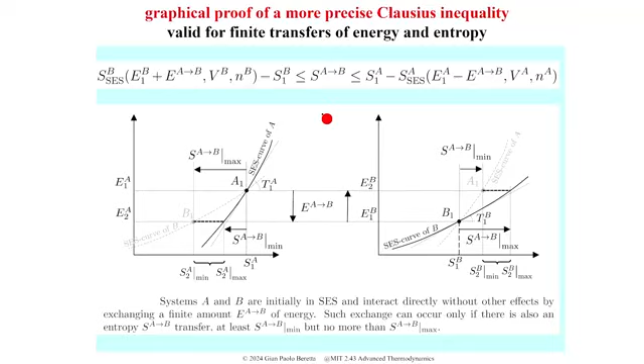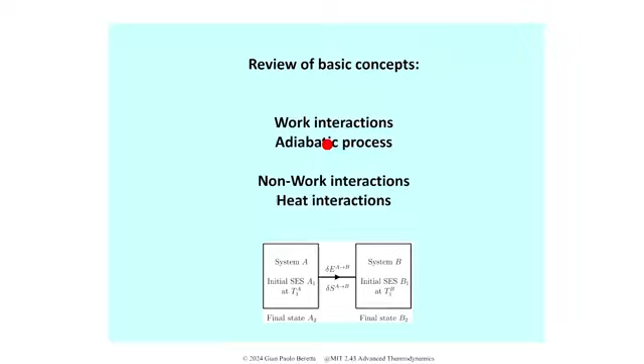So today I wanted to talk about some traditional results. And we still need to define what we mean by heat. First of all, we define what we mean by work. So work is a mode of interaction in which there is no entropy transfer and no transfer of amounts of constituents. So that's, for example, what happens in a weight process. In a weight process, if during the entire process there are no external effects, then the system experiences a work interaction.

As you may read here, it says that a weight process may be adiabatic. We call adiabatic process a process in which there are only work interactions. Why may be and not is adiabatic? Well, because a weight process is a process in which the only net external effect is the lifting or lowering of a weight. The net effect. But you could have some temporary effects that are initially done and then undone, which may not be describable by lifting or lowering a weight. So in that case, it's still a weight process, but during the process there were interactions that may not be work.

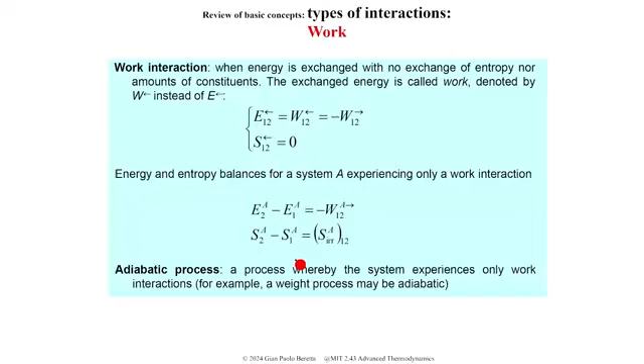But for simplicity, if you want to fix ideas, a good example of an adiabatic process is a weight process in which there are no entropy transfers all along the process. Anything that has an entropy transfer, we call it non-work. So non-work is a very broad class of types of interaction. And in this broad class, there is one limiting condition that we call heat interaction. We will see in a moment the defining idea behind what we call heat. It is a limiting process, and it doesn't exhaust all the possible non-work interactions. So not all non-work interactions are heat.

And in fact, I already anticipated last time that during a heat interaction, we have a very well-defined ratio between the energy that is exchanged, that we call heat, and the entropy that is exchanged. Energy over entropy is the temperature at which that interaction occurs. So in order to characterize a heat interaction, we only need to say it's heat, how much energy is transferred, and what is the temperature at which it is transferred.

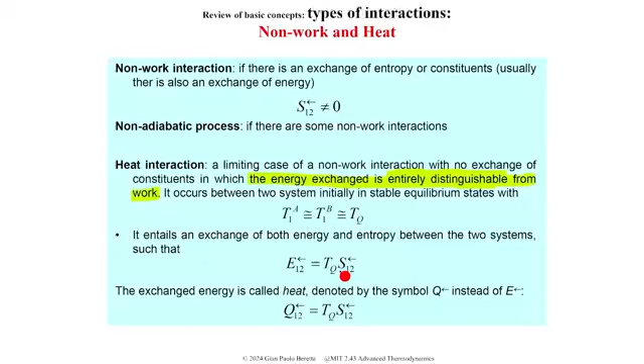But what's the defining criterion for heat? One way to put it is we want to define an interaction which is completely distinguishable from work. So an interaction in which these two systems, say system A and system B, exchange energy and entropy, and no fraction of the energy that is exchanged between the two can be recognized as work.

What does it mean? All right, we do it operationally. Let's say that we extract some energy from system A. And let's suppose that we intercept that energy, and before giving it to B, we feed it to some machinery that will try, at its best, to split that energy into a part that is recognizable as work and the rest.

Okay? So this, sometimes, traditionally you would call it a Carnot engine, or let's call it a cyclic machinery. Cyclic because it has to return to its initial state, and so whatever it does, it's not because you consume the machine, but because of the operations of the machine.

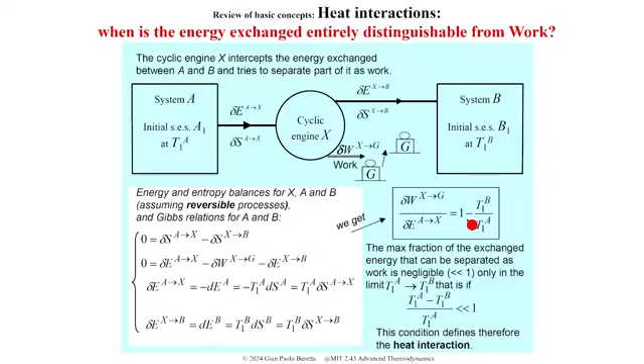We will call heat only in the limit in which this ratio goes to 0. And that goes to 0 only in the limit in which the two temperatures get equal or very close to one another. And in terms of that train of inequalities that we have seen, the Clausius inequality last time, that interval of values, if the two temperatures are equal, shrinks to a single value, and therefore we get a definite entropy transfer for a given energy transfer. And that's how we get the famous equation that delta S, the entropy exchanged, is the energy exchanged over T, so Q over T.

And of course, I have stressed it so many times, but we notice that we are defining heat here using entropy. Usually, it's the other way around. The traditional expositions start from some hand-waving definition of heat, and then some definition of temperature, and then Q over T becomes the entropy. That's what I call the hand-waving heuristic definition of entropy.

That, to be frank with you, is what got me started with this subject, because I was so unhappy with the way the subject was explained to me that I wanted to study more. So it's funny. You hate a subject because you don't understand it, and then you come to love it because you want to understand it.

All right, but how does this definition match with our usual understanding? Because if I ask you what's heat, well, heat is the energy that is transferred between systems at different temperature, you would say. Well, we just said no. Heat is the energy transferred between systems at the same temperature. So is there something wrong? And in fact, there isn't.

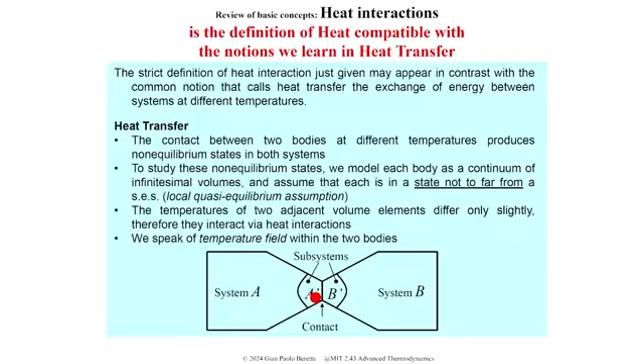This describes what I just said for, say, a solid. So suppose we concentrate on this infinitesimal element of solid or continuum, in which the coordinate is only, let's say, one-dimensional. Coordinate is between x and x plus dx. So it's infinitesimally thin. And it is in contact with the element to the left and the element to the right. And for simplicity, let's just study a steady state situation here and make the energy balance and the entropy balance.

So if I make the energy balance for this lamina, I should put on the left-hand side the rate of change of the energy of the lamina, and on the right-hand side, the net contributions of the interactions to which that lamina is subjected. So it receives Q dot. Now I'm assuming it is a heat interaction. So it receives Q dot from the left, and it gives Q dot to the right. If what comes in on the left and goes out to the right is balanced, same rates, the energy balance says that the rate of accumulation of energy of my system is 0, so that property doesn't change with time.

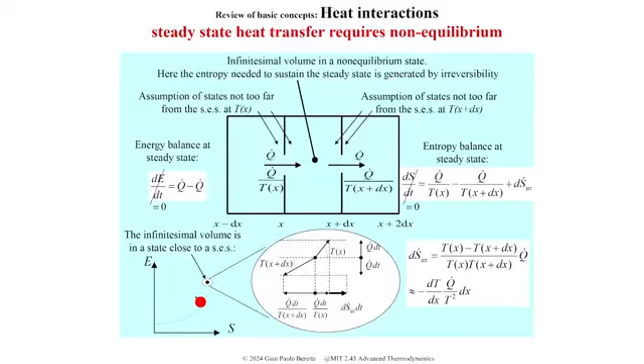But we should not take it too literally, because if we were truly in an equilibrium state, these things couldn't happen. And look at it this way. Let's say that this is the E versus S diagram of my system here, the lamina, the infinitesimal element. Now, yeah, I think I have it bigger here. Okay, so I draw the state of this lamina just a bit off the stable equilibrium state curve. And let's see what happens there. Okay, so this is the state.

The lamina receives both energy and entropy from the left. So from the left-hand side there is a pull that tries to pull the state up because it receives energy, and to the right because it receives an entropy given by Q dot over T. The net result is that the state is pulled in this direction. It wants to move there. On the other hand, there is also an interaction to the right, which takes things away. It takes energy down, so it pulls down the same amount. So these are balanced, and therefore the state will remain at this level.

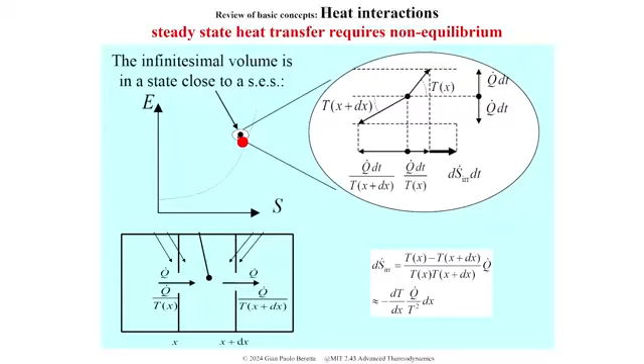This is interesting because it is the local equilibrium model that we are used to in fluid mechanics, but you can improve. And people are doing extensions of fluid mechanics treatment in which you deal with this little difference in entropy, because maybe you can assign a temperature, but the entropy of this state is slightly less than the entropy of a truly equilibrium state at that temperature. And that difference in entropy sometimes has an importance for certain applications. Okay.

So now I wanted to talk about these very traditional ideas of heat engines, heat pumps, and refrigeration units, and see the energy and entropy that flows, and it also gives us the opportunity to define what we mean by first and second law efficiency of devices like this. So let's start from what we are seeing. So let's do it our own way.

Suppose we take the Clausius inequalities that we have seen the other day, and remember that these subscripts over the inequalities indicate what the condition should be for the strict equality to hold. And here, if you remember, we have a strict equality if the system is in a stable equilibrium state and ends in a stable equilibrium state, and it is a reservoir, so that the second derivative is equal to 0.

So let's consider our system to be a reservoir at temperature TA. I drop the subscript 1 because for a reservoir there is always one temperature for all states. And let's assume that also system B is a reservoir. So also for B here I have an equal sign. Okay?

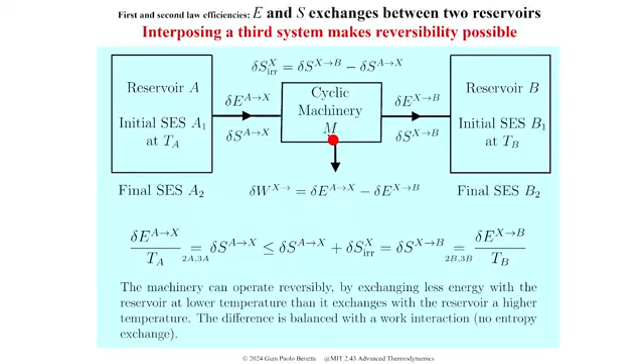But the machinery is there just to recognize that in order to pass that entropy to system B, it doesn't need to give it all the energy it received from A. There is an unbalance, a difference, which can be transferred out by means of an interaction in which there is no entropy transfer: work. Okay, so that's the idea of the heat engine.

Machinery that receives heat from a reservoir at high temperature. This is a heat engine between thermal reservoirs, because you could also have heat engines between systems that are not reservoirs. You take a big piece of steel out of a steel making plant, and I want to recuperate the energy that it has before it cools down. That's a way of recovering energy from industrial processes. And of course, as I cool it down, the piece of steel decreases its temperature, and so it's not a reservoir.

That doesn't mean we cannot compute also for that situation what is the maximum work that we can extract. But that's another situation. And for example, the maximum work we can extract in that case is not the Carnot coefficient. Whereas here, if you do energy and entropy balances, and here they are, I'm going sort of quickly here, and I'm not going into the details, I'll just give you some ideas by following the flows of the entropy. But here is the full glory of the balance equations for the machinery, from which you can compute the work.

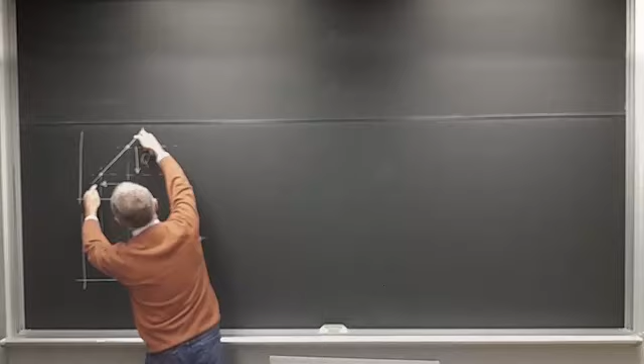Okay. So the difference between this and that is the work. You can also, if I draw a line with the slope of reservoir A here, this is the work that I have extracted. Actually, this is W rev, because I have assumed that system B takes just barely the entropy that is being received from system A. So the entropy comes from A. The machinery doesn't add because it's reversible. It doesn't produce additional entropy. It simply has to transfer it to system B.

And the energy that is required to transfer that to system B is less than QA, and therefore there is a difference, and that difference can be transferred in an interaction where there is no entropy transfer, which is work. So this is the reversible operation.

If we have an irreversible operation, so if the machinery is irreversible, like most practical machineries, and therefore it produces some entropy, that entropy will also need to be disposed of into the environmental reservoir, and therefore it will require more energy to flow. So in system B, I need to add not only this entropy, but also the entropy that is produced by irreversibility. So that is S produced in the machinery, and the machinery is called M. Okay.

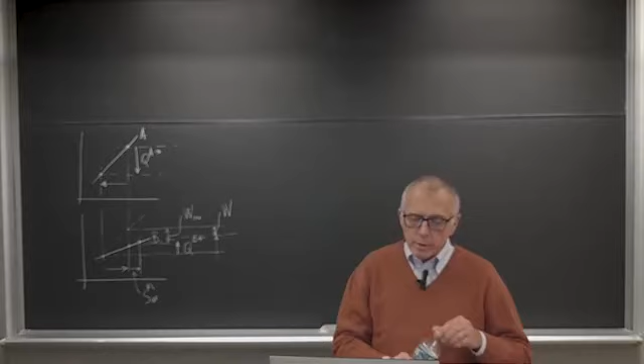What is somehow inconvenient of first law efficiencies is that usually, if something is 50% efficient, one would say, oh, why aren't you doing better? There is 50% room for improvement. Not here, though, because there is no way. Suppose you have TA equal to 600K and TB is 300K. So the Carnot coefficient is 1/2, 50%. That's the maximum you can do. There is no improvement. You cannot improve.

So people have introduced the second law efficiency, which compares what you actually obtained, in the numerator, to the maximum that you could have obtained given the constraints and the physical laws, so without violating anything. Okay, so in that case, this ratio for the reversible case is 1, so it's 100%. And so if the efficiency is 100%, there's no room for improvement.

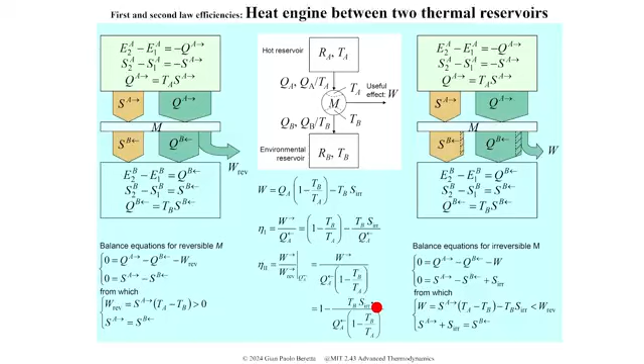Okay, so let's do even more quickly the same idea, but for a refrigerator unit. It's again a situation in which I have two reservoirs, TA and TB, and I identify the environment as the system at higher temperature now, and the other system at the lower temperature is, for example, the refrigerator cell, the room that you want to keep refrigerated.

And you want to keep it refrigerated, so since typically there are heat losses from the walls of this refrigerator, you need to compensate by removing heat. So the unit wants to extract heat from a reservoir which is at lower temperature than the environment. So let's do again the construction here.

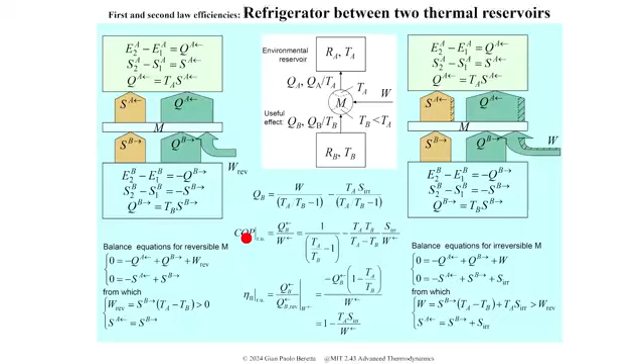The last of this series of traditional machineries is the heat pump. The heat pump is very similar to a refrigerator, more or less the same equations, except that now what switches is the position of the environment, the environmental reservoir. Whereas for the refrigerator, you were extracting energy from something which is colder than the environment, in the heat pump, you want to put energy in a reservoir which is hotter than the environment. So now the environment is system B. But the idea is more or less the same, except that the useful effect now is not the cooling of B, but is the heating of A. You want to heat up something like the house using a heat pump, which is nowadays being done worldwide, at least in places where you need heating in the winter time.

And so the useful effect is QA. Therefore, you define a different COP. It's called COP, but it's a different definition. This time you put in the numerator the useful effect, which is the heat given to the hot system, divided by the work that you have spent in order to do it. And again, the second law efficiency is the ratio between the useful effect of your actual machinery and the useful effect of the reversible machinery, so that it would be equal to 1 for a reversible machinery, and it's less than 1 if there is entropy produced by your machinery here. Okay?

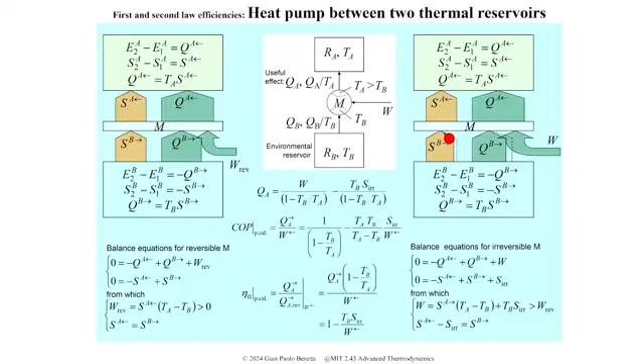So since now we are talking about some practical aspects, let's talk about another chapter of thermodynamics that has to do with establishing the properties of substances at stable equilibrium. And this is an important chapter. Many scientists have devoted their lives to constructing the properties of substances. For example, to stay here, Professor Keenan in 1940, or maybe earlier, spent a lot of time developing the steam tables, which are the properties of water. So how do we measure properties of substances in stable equilibrium?

Well, much of the tools that we have are related to the conditions for mutual stable equilibrium that we have developed, like equality of temperature, equality of pressure, equality of chemical potentials. The good thing is that if you have a thermometer, what is a thermometer? A thermometer is a system in which you have put a scale in which you can read the value of the temperature. Then you stick it in contact with the system you want to measure, and you leave enough time so that you convince yourself that the two systems have reached mutual equilibrium. And if you are convinced that they are in mutual equilibrium, then the theory says that the two temperatures are equal. So by reading the temperature of the thermometer, you have measured the temperature of system A, of which you may know nothing. So it's an indirect measurement of a property.

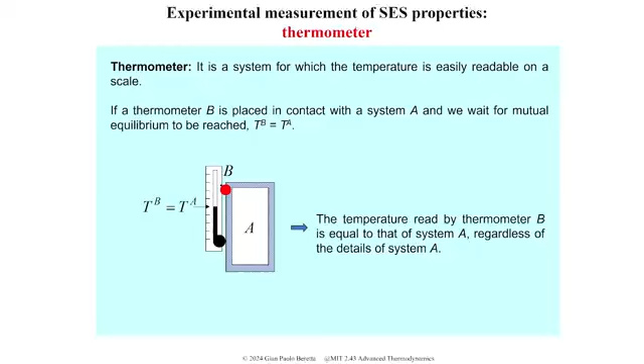Similarly, the manometer, you can construct a manometer so that you can read out on a scale the value here. You put it in mutual equilibrium with your system by drilling a little hole in the boundary and with either a little piston or some moving interface like here.

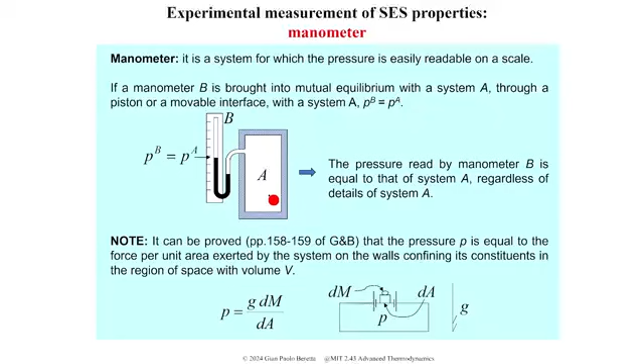If you are convinced that they are in mutual equilibrium, reading the pressure of B gives you information about the pressure of system A. So this is one way of measuring it. Yeah.

This is just to remind of that proof that I don't want to go into details of, but that it shows why the pressure can be measured by measuring a force per unit area anywhere on the boundary of your system. So you take the boundary of your system when it is in stable equilibrium, drill a hole, and substitute that piece of wall with a movable wall.

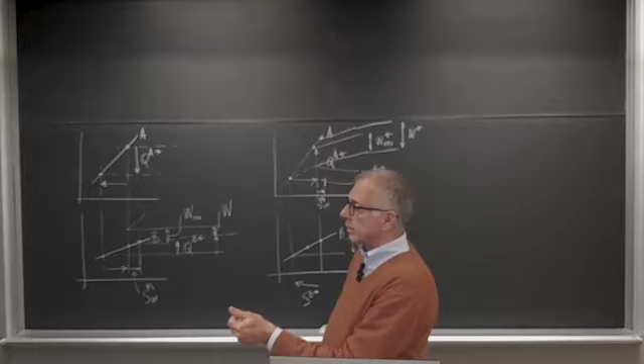And then you find a force per unit area that keeps that wall where the original one was. Once you found it, you have measured the force per unit area that balances the pressure of your system. And when you are in stable equilibrium, that force per unit area is equal no matter where you go and do this procedure. Whereas off equilibrium, you can always measure force per unit area, but it may be non-uniform, not equal everywhere. And there is no pressure because you're not in equilibrium.

Another kind of measurement that we can do is like the so-called Joule apparatus, in which you input some mechanical energy in your substance, in a piston or in a variable volume or in a constant volume container. You put some energy in, wait for the system to go to a new stable equilibrium, and measure how much the temperature has changed for your system.

So mg delta z represents the amount of energy that you have put in the form of work. So you produce a work interaction and put energy into your system. Let it relax until it reaches equilibrium, so new temperature. Compute the difference between the new temperature and the initial temperature, delta T. This ratio turns out to be equal to the partial derivative of this property that we're going to define in a moment, and that's the property that we call heat capacity at constant pressure. It's a stable equilibrium state property. We obtain it from the fundamental relation.

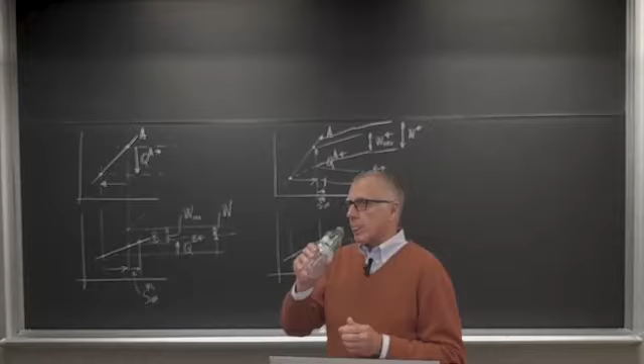Now, in the business of measuring properties, we like to have instruments, okay? So we have a thermometer, measures temperature. Manometer measures the pressure. There is no energy meter. There is no entropy meter. We measure energy and entropy indirectly through temperature and pressure and volume.

So let's do that also mathematically. So you look at this equation here and this other equation, and consider it as a system of two equations in which you want to eliminate the property that is hard to measure, which is the entropy.

So, for example, solve this function here: instead of T as a function of S, write it as S as a function of T. And then take that S and put it in the original function up there. You manage to find H as a function of T, P, N. So you change the independent variables to ones that can be easily measured, temperature and pressure.

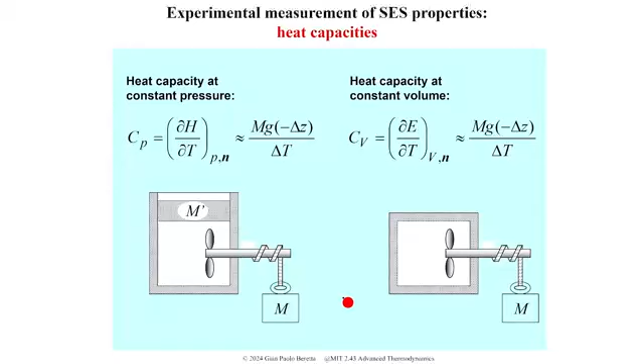So pressure and temperature we can measure. Heat capacity we can measure with this instrument here. And so this is a fully measurable function. A similar procedure we can follow to define the heat capacity at constant volume.

So we start again from the fundamental relation. And notice that the temperature, which is the partial derivative of E with respect to S, being a derivative of a function of these variables, has the same independent variables, so it's also a function of S, V, and N. And also here, play the game of eliminating the not so easy to measure property entropy.

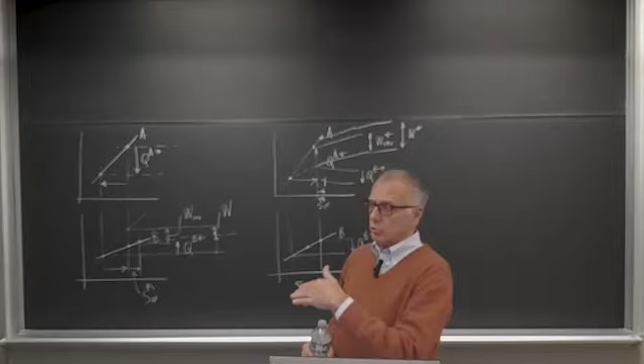So solve this as S function of T and substitute up there to obtain a new function in which the energy is expressed in terms of the independent variables temperature and volume. These are things that are easy to measure, because temperature you measure with the thermometer, volume you measure with the stick.

Okay, so the first derivative of this function, the partial of E with respect to T, is called the heat capacity at constant volume, and it is the thing that you measure with the Joule apparatus at constant volume. So we'll take that.

But we can also do this other procedure. We take the temperature, like before here, but now we make a system also with the pressure. The pressure is the derivative of E with respect to V. And being a derivative of a function with these independent variables, it also has the same independent variables. Eliminate entropy also from these two.

That results in a relation between pressure, volume, and temperature, which we call the equation of state. Pressure, volume, and temperature are also easily measurable stuff. That's the equation of state. And the partial derivatives of this equation of state, so the derivative of V with respect to T, says how much the volume of your substance changes as you vary the temperature, as you heat it up.

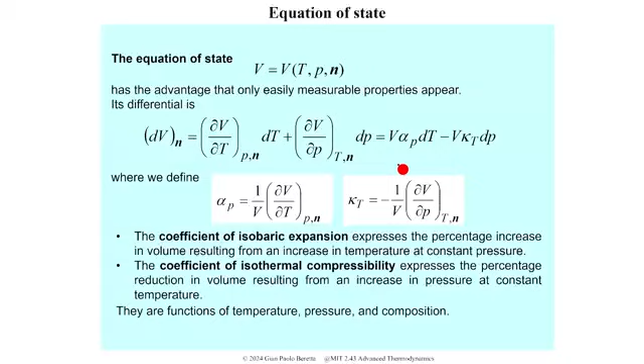There are other things that you can measure in other experiments. For example, an interesting one is the speed of sound propagation. Should be an "of" here. Or the Joule-Thomson coefficient in the expansion of a gas in a throttle, which occurs at constant enthalpy. You measure the change in temperature over a drop in pressure, and it can be positive and negative, and that is related to the properties that we have already defined before.

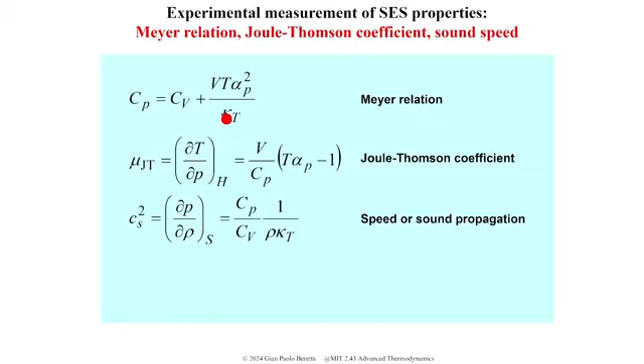And also the Meyer relation shows that Cp, Cv, alpha P, and kappa T are not independent. So you don't need to measure all 4 of them. You just need to measure 3. Let me skip that one for a moment. No, I need it.

Okay, in order to measure chemical potentials, I do need first to show that the chemical potentials can be written as functions of temperature and pressure.

So, because you see, the chemical potential is defined as the partial of E with respect to N at constant S and V. But that way, it isn't easy to measure because of the S. So mu_i is the partial of E with respect to N_i at constant S, V, and all the other N's held, well, I shouldn't say that, where the function that I am taking the derivative of is a function of S, V, and all the N's.

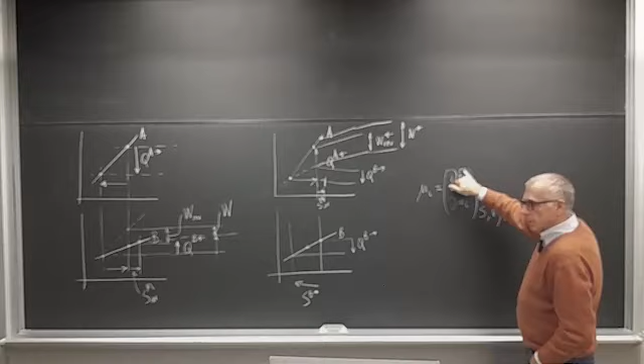However, when you view it this way, it's not easy to measure because I don't have an energy meter and I don't have an entropy meter. So the trick is to change variables. And one way to do it is to define a function which is called the Gibbs free energy. For the moment, think of it as just an arbitrary definition. So G is defined as energy minus TS plus PV. Write the differential. Use the differential of the fundamental relation in order to express dE. And here is what you're left with.

This expression shows that you can view this function G as a function of the independent variables that appear under the d of the differential, so the temperature, the pressure, and the amounts. So G has as natural variables T, P, and N. And since this is the differential of that function, the chemical potential can therefore be written now also as the partial of G with respect to N_i. And since it is a partial of G, which is a function of T, P, and N, it's also a function of just T, P, and N.

Okay. So the chemical potential, we would like to measure it. It is very important to determine the properties of multi-component systems. But it cannot be measured directly. There is no chemical potential meter. However, it can be measured indirectly via the definition of what we call the partial pressure of a component in the mixture.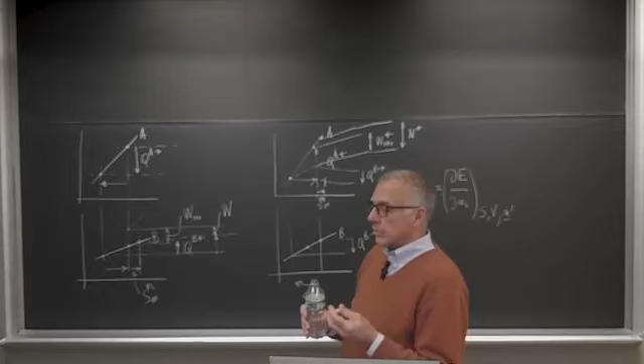in mutual equilibrium. When I reach mutual equilibrium with this little system ii, the double subscript ii we use as a way to say that it is a pure substance. So in this little box, there is only substance i, whereas in the mixture, there is substance i mixed with other stuff. Okay. When we are in mutual equilibrium across this membrane, we have proved the other day that the conditions for mutual equilibrium are equality of temperatures, so the temperature of system ii must equal the temperature of the mixture, and equality of chemical potentials for the substance that can be exchanged. So the chemical potential of substance i in the mixture must be equal to the chemical potential of the pure substance i just on the other side of the semi-permeable membrane. Okay.

Okay, here I also put the functional dependence because I used what we just proved before, that the chemical potentials can be written as functions of T and P. And so these are the functions that we're going to use for this measurement. Okay, and so by looking at this equation, which is required by the condition for mutual equilibrium, we see that the independent variables are all easily measurable things: temperature, pressure, and also this P_ii, the pressure of the system on the other side of the semi-permeable membrane. We call that pressure the partial pressure of constituent i in the mixture. It is a property of the mixture, and it can be measured.

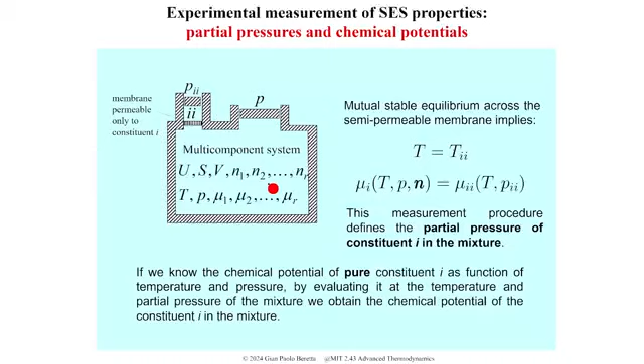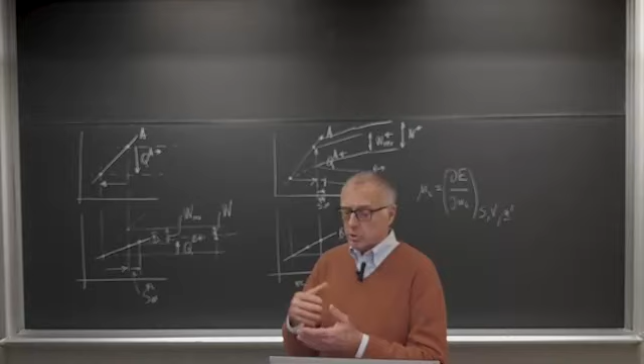Then we define some other properties based on the fundamental relation for stable equilibrium states. So clearly these are defined only if you have a fundamental relation, so they're defined only for stable equilibrium states: temperature, pressure, chemical potentials, the enthalpy, the Gibbs free energy. The enthalpy because it's E plus PV, and P is the pressure. Pressure is defined only for a stable equilibrium. Or the Gibbs free energy has the P and the T also, so it also is defined only for stable equilibrium states.

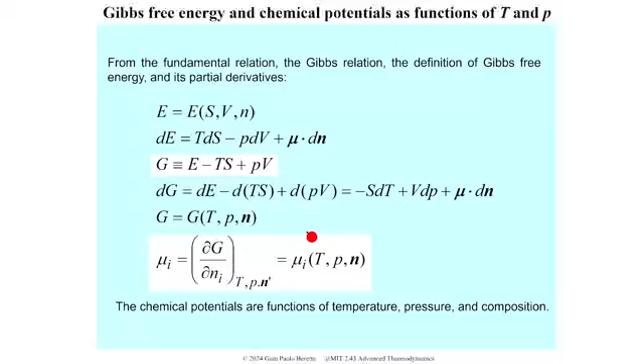And then we also defined these four properties today: the heat capacities, the coefficient of expansion, and the coefficient of compressibility. These ones also are restricted to equilibrium states, but they're even more restricted because of some of those mathematical steps. For example, if I go back here, when I do this eliminating one variable, I can do that only if some derivative is not equal to 0.

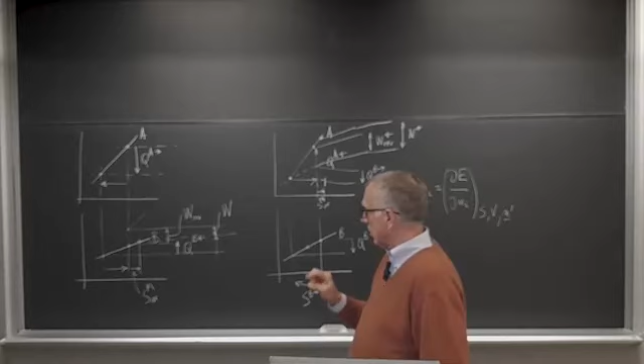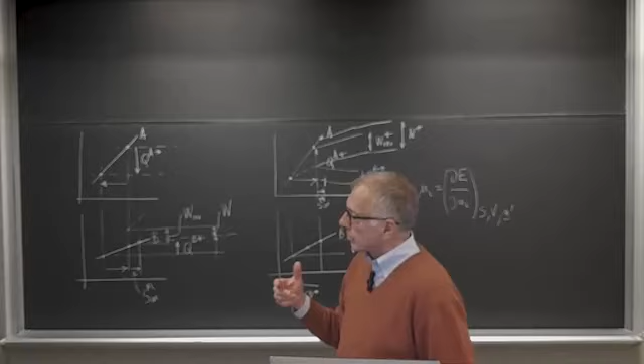So, for example, if the partial of T with respect to S is equal to 0, I cannot invert that function because it's not monotonic, and this is what happens, for example, when I have two-phase states, like liquid and vapor coexisting. In that case, some of these functions are not defined, or, which is the same, take up infinite values. Okay, so we go back to here.

Now, this also says that if we do our measurements, we can, for a given substance or for a set of mixtures, develop or measure experimentally these functions: alpha P as a function of T, P and composition, kappa T as a function of temperature, pressure, and composition, the heat capacity at constant pressure as a function of temperature, pressure, and composition, and the chemical potentials as a function of temperature, pressure, and composition.

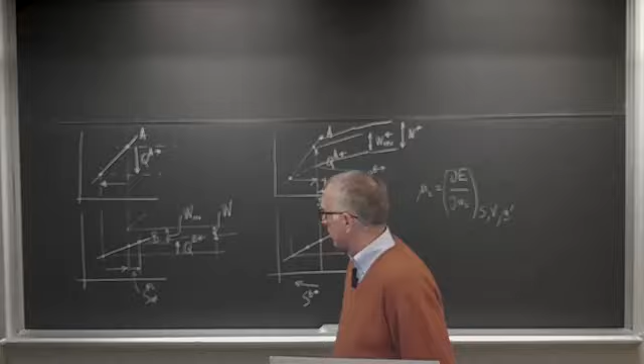I want to show that some of these functions, like the enthalpy and the Gibbs free energy, are obtained as Legendre transforms of the fundamental relation. Legendre transform is a particular procedure that we can explain in this way. Let's start with a function of a single variable. So suppose you give me any function of a single variable. But to simplify, let me suppose that this function is either convex or concave and monotonic, so that I can invert and play with it.

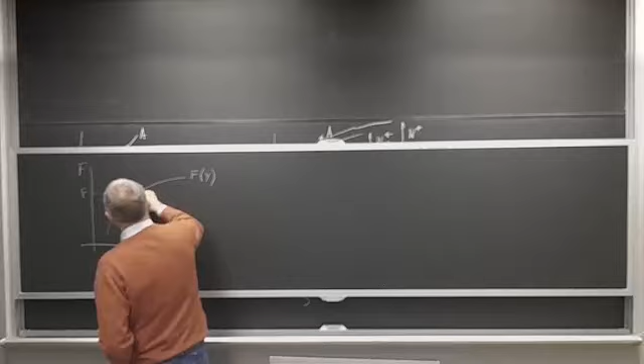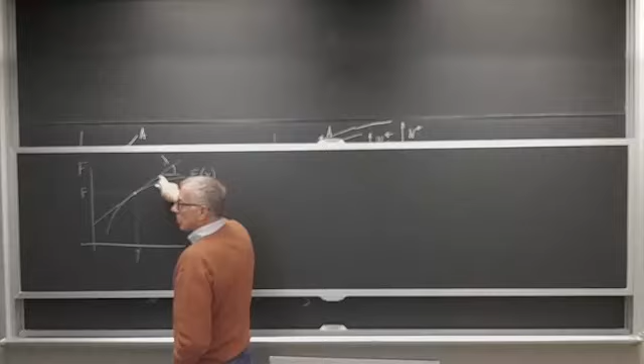Okay. So usually we define a function, I'll call it f of y, meaning that for each value of y, I get the value of f. And as I move y, the function tells me how f moves. But there is an alternative. The idea of Legendre is that there is an alternative description, because that function also has a line tangent to every point. So this tangent is characterized by two items: one that we will call lambda, which is the angular coefficient, the slope of the line, and this other value here that we call L, which is the intercept at y equals 0.

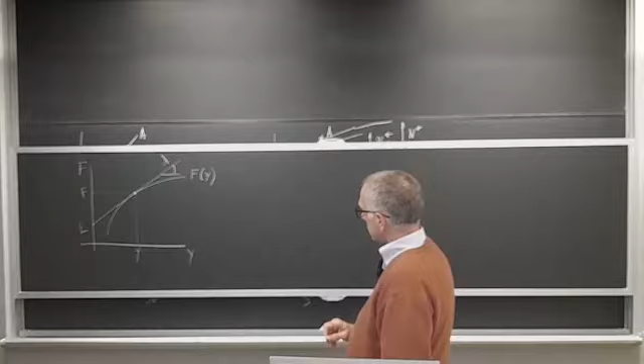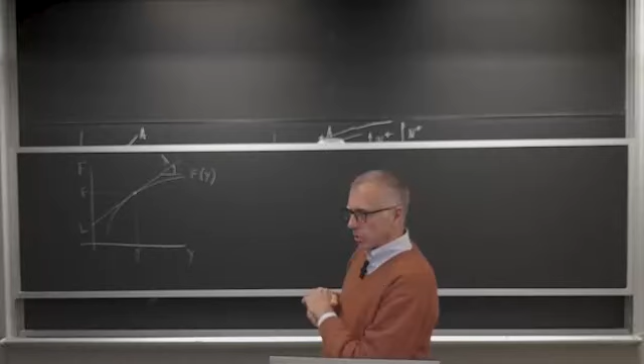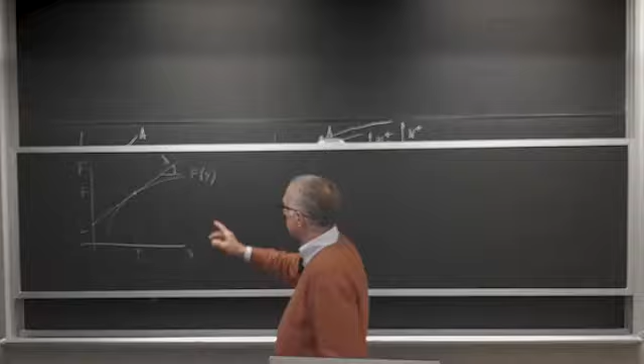Okay. So the idea of Legendre is that if you draw, like it's sketched here, the tangents at every point of the line, you get a family of lines, the envelope of which is your original curve. Each line is characterized, for a given lambda, by an L. I change the point, so I take another lambda. Suppose I want this slope this much. Okay, so I fix lambda. So say this is lambda 1. Now I fix lambda 2, and that gives me L 2.

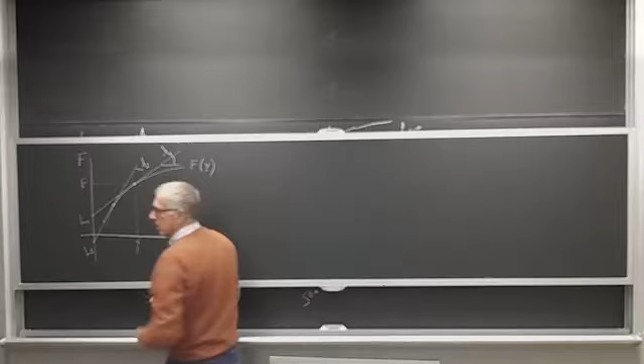So selecting a value of lambda selects the point in which the tangent of the original curve has that slope, and therefore when you place your line there, it also selects an intercept. So there is a relation between lambda and L, and that relation is the Legendre transform of your function. The procedure runs this way: you take the function, you write the equation for the derivative, and then you define L by the geometrical construction.

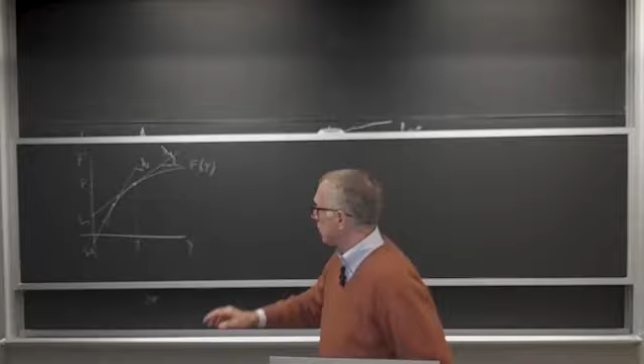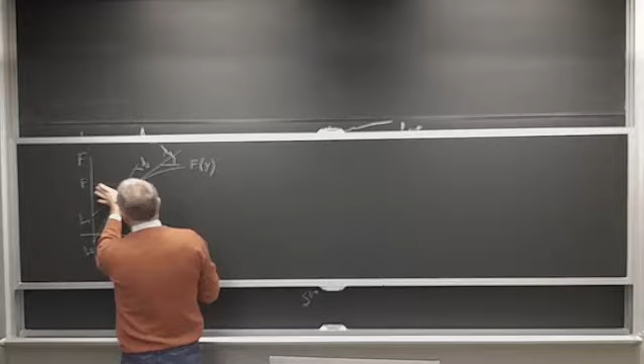So it's the function f minus this distance here. Okay, and this distance here is equal to the horizontal segment times the slope, so the tangent of this angle, so this lambda. So L is equal to f minus lambda times y. So it corresponds to that description.